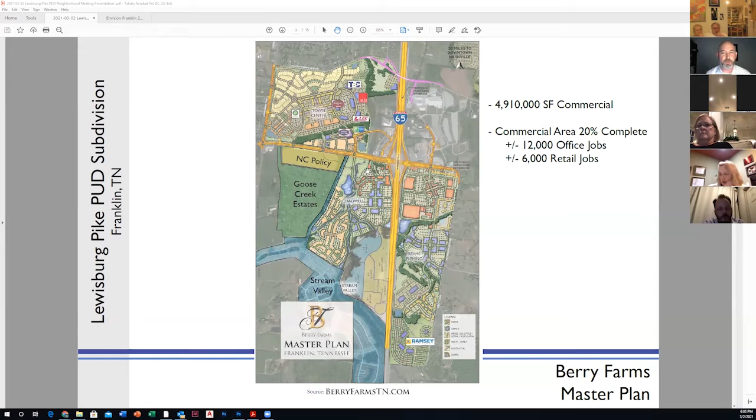This property is along the Lewisburg corridor, in immediate proximity to Berry Farms and the Berry Farms development. Berry Farms will ultimately have over 4.9 million square feet of commercial, becoming a very big job center here in the Franklin area along I-65. We're looking at the opportunities along Lewisburg Pike to potentially provide homes for those people who would be working at Berry Farms, who are looking for shorter drive distances, a shorter commute to the office or their place of business.

You'll recognize this property from 2019. We submitted it concurrently with Southbrook. Southbrook PUD is currently north and south of Stream Valley's main entrance. This PUD was withdrawn in its entirety after several of the aldermen asked that we intentionally phase or submit these developments in separate PUDs, and so that's what we have done. Southbrook was approved in 2019.

We don't have a neighborhood name yet established for this area west of Lewisburg Pike, so on the front cover it's referred to as Lewisburg Pike PUD. There will be a formal neighborhood name for this, but that name must be approved through Williamson County Emergency Services and by the City of Franklin, and that's a process we're going through. So we'll let your HOA presidents know or send out emails once we have an established formal name for this proposal.

The proposed development has not changed very much in layout from the Southbrook PUD. The Lewisburg Pike PUD consists of a total of 243 acres in size. Envision Franklin identifies the property in the conservation subdivision policy, and that policy creates development design guidelines very intentional to set aside and preserve open space. On our plan, we have a total of 61% of the site that will be preserved in open space areas.

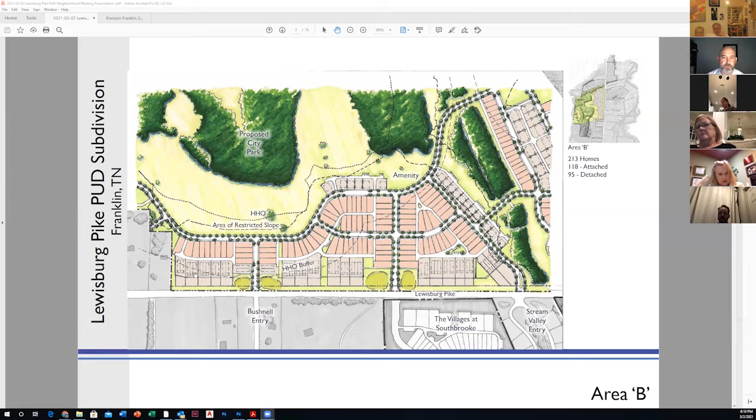So when we design this area, the multiplex buildings are designed to look and feel like one single family house. They have a common entrance facing Lewisburg, but they may have 2 or 3 families that live in each of the buildings.

And so you can see them here. This is the proposed Lewisburg PUD on this side of the road, and then the current approved Southbrook on the east side of the road with these multiplex buildings directly across the street.

Now, a lot of you may be wondering why we're showing a median divided boulevard for Lewisburg Pike. Ultimately, one day this will be the design plan for Lewisburg Pike, but we don't have a timeline or know when that construction would take place. When we do a master plan design, we always have to look into the future.

And someday in the future, it's planned by both the state and the city of Franklin for Lewisburg to be a median divided 4-lane road. So we have to design our plan to accommodate that future improvement, but there is no timeline today as to when that would take place.

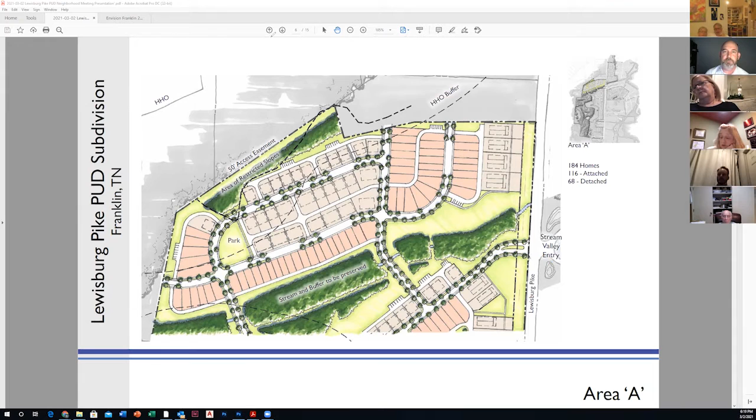Does that make more sense? Yeah, I understand now. Thank you. Here's Stream Valley, you're over here on the east side of the road, so directly adjacent to you or across the street. This is where the traffic signal would be installed to allow easier access in and out of both of those neighborhoods. Yep, got it, I agree. It's very helpful, thank you.

Hey Greg, this is Dennis. So question, you've got the Villages at Southbrooke happening now. Does the Meadows at Southbrooke go next, and then this area across the street, or what's kind of your plan as you look at those three segments? Sure, you may be aware of Chadwell's development plan that's being proposed here. In order for the Meadows at Southbrooke to have sewer, a sewer line needs to be constructed right down this little stream channel.

The timing of when this development, the Meadows at Southbrooke, would occur is really contingent upon Ford and Boyle getting together to talk through the dynamics of when that sewer line could be constructed.

Greg, sewage is at the corner of Goose Creek Bypass and Lewisburg Pike now, is that right? And is there any plans for that to come down Lewisburg Pike? There's, I don't know if you can see this, a kind of a ridge line right through here. So the center of the ridge would be through here, imagine that center line continuing.

Anything north of that is going to have sewer that goes toward that intersection. Anything to the south of that is going to follow through this tributary, and I think there's another one down in this area here. Those are existing sewer lines. So a little bit of a different sewer basin than what's up there at the intersection of Goose Creek and Lewisburg Pike.

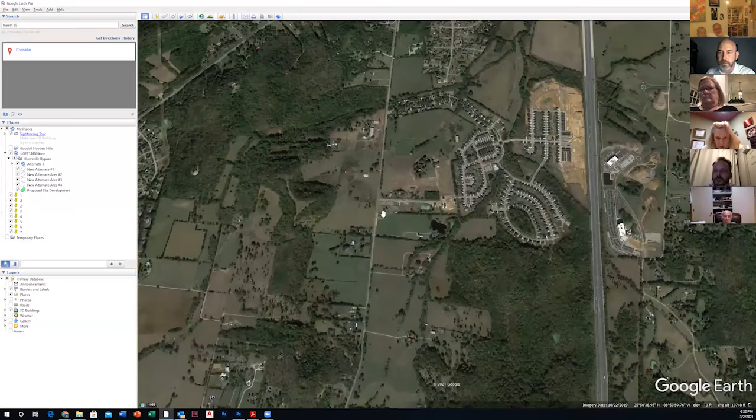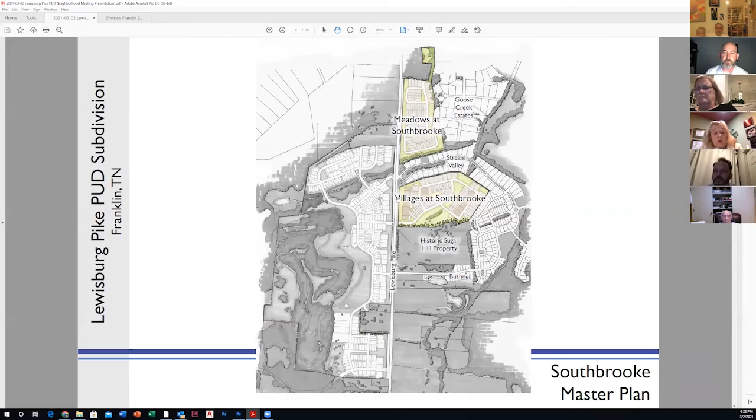What they're looking at is potentially a collector road that would go from this side of I-65 all the way across in some way. Now I'm drawing dashes, but I don't have a direct path, but in some way connecting back over to Goose Creek Bypass and Columbia Pike. So that being said, what we're showing as a part of this southern neighborhood is the start of that collector road, but we don't have control over what path it would take to eventually make its way to Columbia Pike or how long that build out would occur.

But yes, the city engineering department is asking us to start that potential collector road that would stop. It would go from Lewisburg Pike and stop at the property line here.

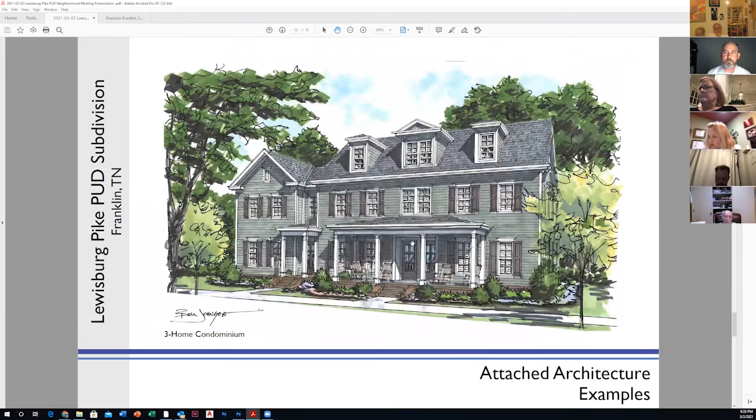Thank you for that. Yes, sir. Hey Greg, this is Dennis again. So right now, what's your process, what's your steps? You're going, one, just to become part of the city. What's your timeline for the, we'll call it the west side of 431?

Sure. So tonight is the third step in our process. We've made a pre-application submittal to the city, and we reviewed our submittal with city staff as of this morning. Tonight is our neighborhood meeting. We're planning on making an initial submittal on March 8th, which would put us on track for the March 25th joint conceptual workshop. If we continue on path, that would put us on track for the Planning Commission on April 22nd. May, June, and July would be board and mayor and alderman meetings, their voting sessions. So if it was a linear path and every single meeting was kept in that path, then...

By the end of July, this property would likely be annexed into the city of Franklin and the development plan approved. As far as the start of construction, Ford would prefer to really focus its time, energy, and efforts on this first phase of Southbrook.

The city of Franklin is contemplating a small area plan for this area south of Ladd Park that includes primarily future development growth that would occur over on the east side of I-65. That being said, they are looking at sewer capacity, and they're looking at a regional traffic study that would encompass more of this area. So we want to go ahead and have this plan be a part of that conversation and discussion. We're excited that the city is really starting to look regionally, looking a little bit bigger picture about all of the growth pattern and future development that's down both the Carothers Parkway corridor, I-65 corridor, and Lewisburg Pike. So we're submitting this now to really get into that conversation.

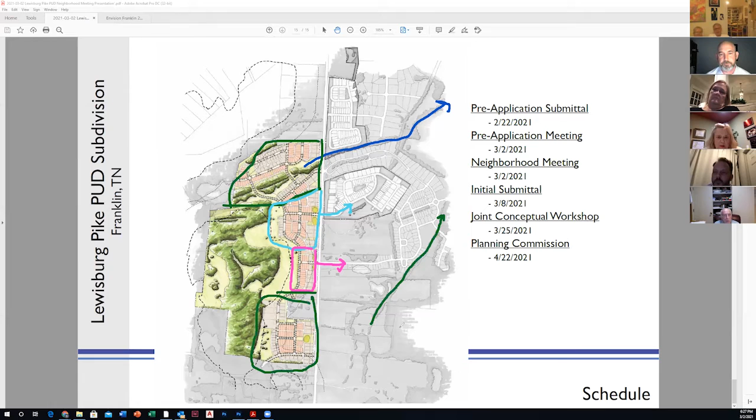So in other words, there would be no sewer for this area. And when this is constructed, how would you get rid of the sewage problem for that area? Sure, the city of Franklin looks to the private developer to extend those city services. So the private developer would have the responsibility of working with adjacent property owners to acquire easements to achieve that sewer plan.

There is a potential from this part of the road to stay along Lewisburg Pike and then go down Bushnell, although that really doesn't follow the city of Franklin's long-range sewer plan. They would much rather have a sewer line that's traveling down through this lower portion here. So there are a couple of options on how this area to the south does get sewer, but the city of Franklin really looks to the private developer to work through those questions.

Well, what I don't understand is these proposed houses in the salmon color on the south end. Would they have septic tanks? No, they could be approved as part of a development plan, or a bigger master plan. But before you could get a site plan, construction documents, or a grading permit for this area, we would need to work through where that sewer line would go. So no, they would not have septic tanks. So if that area is constructed, it would have to have sewer. Is that correct? That area could not be constructed until sewer is made available.

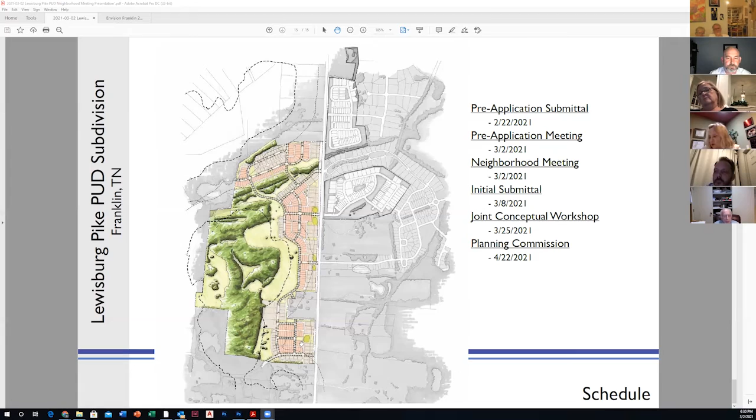Well, here's what I don't understand, maybe you can help me understand it. I saw that the property south of this was for sale on Lewisburg Pike again. Is that not so, or am I mistaken?

I'm not sure of any properties to the south of this. If there is a for sale sign on this property, Mike Ford and Ford Homes has this property under contract. There was 170 some odd acres of parcel, is this part of that 170 acre parcel? I'm not sure, but let me do a little homework, and why don't you reach out to me sometime this week or first next week, and I'll help you figure that out.

All right, I'll look forward to talking to you then. Yeah, I may have to come out there and meet you and see what you're talking about, but we'll do that. All right.

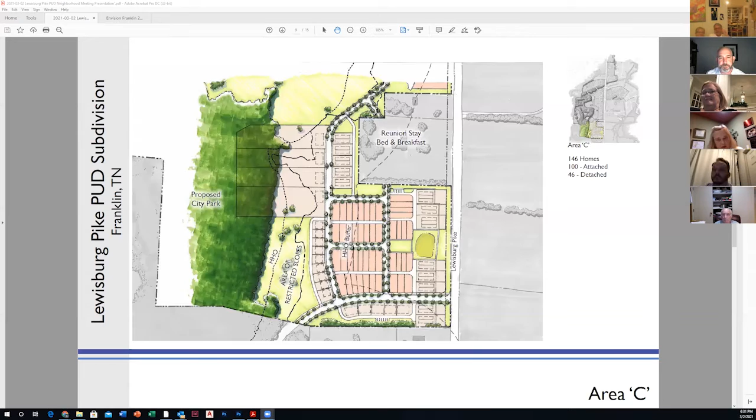Hey Greg, is there any commercial or retail? There is no commercial or retail. The conservation policy allows for a clubhouse, amenity area, swimming pool, which we're planning for here, but no commercial activity.

Show me again where you just pointed to. All right, yeah, let me mark that. The pool and amenity area will be located here. Okay, thank you.

Yes, ma'am. I was wondering where the people will be zoned for school. The schools will include Thompson Station Elementary, Thompson Station Middle School, and Independence High School. Okay, thank you. Yes, ma'am.

And then what is the price point for the houses? I don't know that they've been established yet, but if you looked at the homes Mike is currently selling in Berry Farms, that will give you a very good understanding of both price point and square footage and size. Great, thank you.

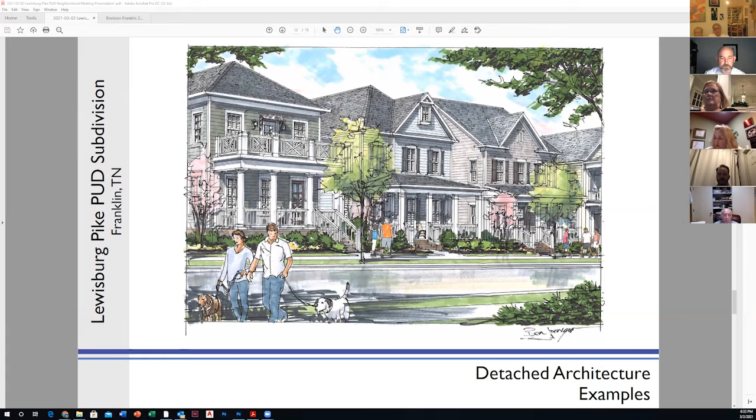Greg, it's Kim again. When you said the traffic signal going into Stream Valley and across the street would start when construction started for the west side, is that correct? We have several different phases and we're still working through the finer details of that. But we do know that this general area would be phase one, and it would line directly across from the Southbrooke main entrance. So this traffic signal would not likely be constructed until this road was built, and before this road is built, we need to have this sewer line connection over to Berry Farms. So I don't have a timing on that yet. I can't tell you it's going to be in '24 or '25, but my guess is it's probably going to be around that time.

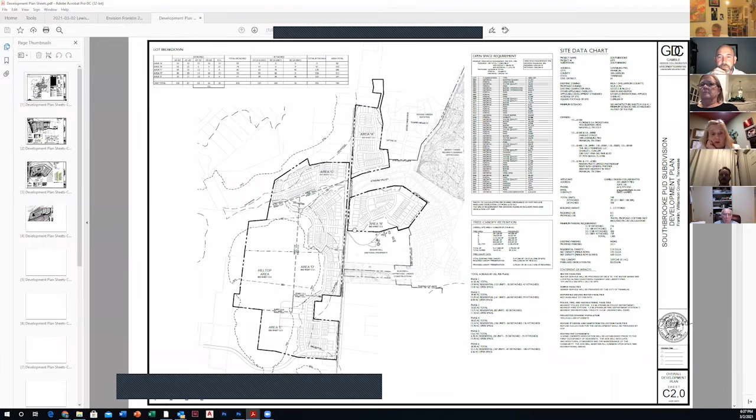Hey Greg, as you're pulling those up — so the villages right now, that's the part that's under construction. What's their timeline for the roads being done? What's their estimate? My guess is that by fall of this year we're going to start to see the first houses under construction. Typically it's about five months to build a house before you have the first resident move in.

Is this helpful? Yes, thank you, great. So this is what's currently under construction — this is the Southbrooke development plan for the villages to the south. That's Randall Lane there. And you said homes would start construction in the fall? I would think so, yes.

So Greg, you know our pain point — this is going to go directly into Kim's, right by Kim's house, and some other neighbor who's not on Facebook. Will Stream Valley roads be used for construction? No, all the construction activities are directly off Lewisburg Pike. Yeah, there was a lot of debate and discussion about having a direct road from Stream Valley all the way through. After meeting with you and several of your neighbors, we discussed a more circuitous path with a few turns that would still allow residents to get from Stream Valley out.

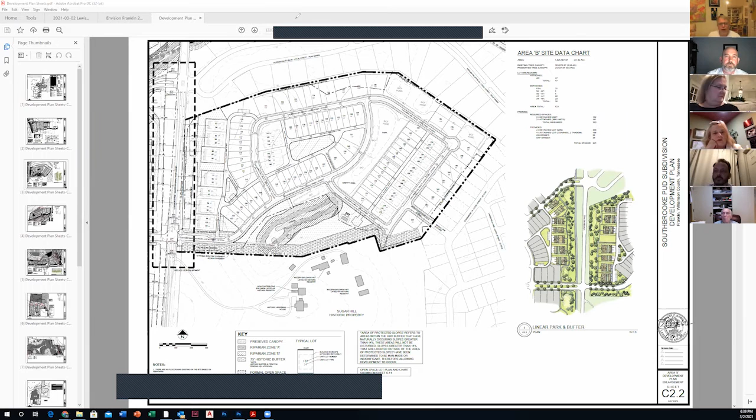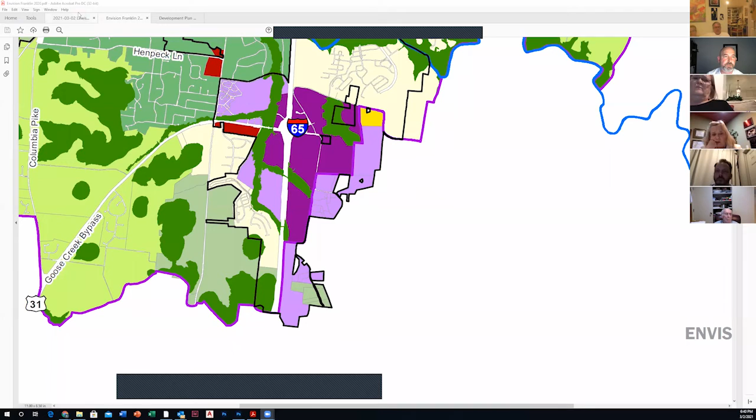Do you know if any of this changes where we are on a flood zone? I'm not familiar with any. There are flood areas — this is the Envision Franklin map. You can see these green areas here through Stream Valley and through the Chadwell site; those are 100-year floodplain. The dark green you're seeing over here on the west side is the HHO area — that's the hilltop protection. So the only floodplain I'm aware of is down here along the streams and those tributaries.

Any additional questions, comments, thoughts? Greg, Larry Levine again. Yeah, Larry. The changes to Goose Creek bypass — is that just at the intersection or does it go further down Goose Creek bypass?

Sure, that's a great question. These are the improvements associated with Southbrooke that incorporated the west side of the development at the same time. Our traffic study looks holistically at all the improvements along Lewisburg Pike. Now, Berry Farms is going to be making additional improvements down Goose Creek toward I-65 as they develop their Chadwell master plan. So there are multiple private developers doing multiple road improvements.

Well, in particular, is Goose Creek bypass going to be widened as far as the fire station?

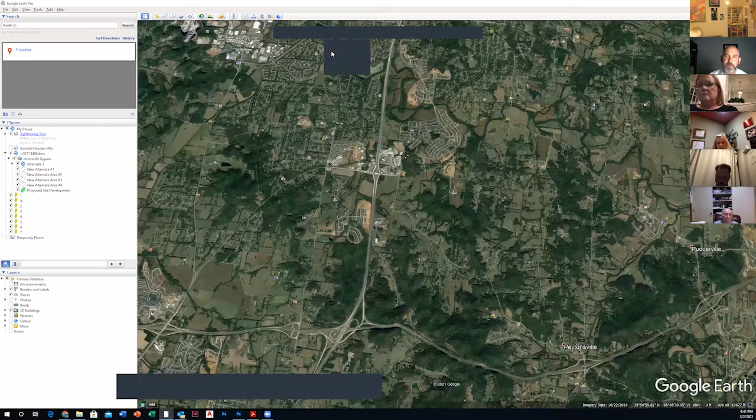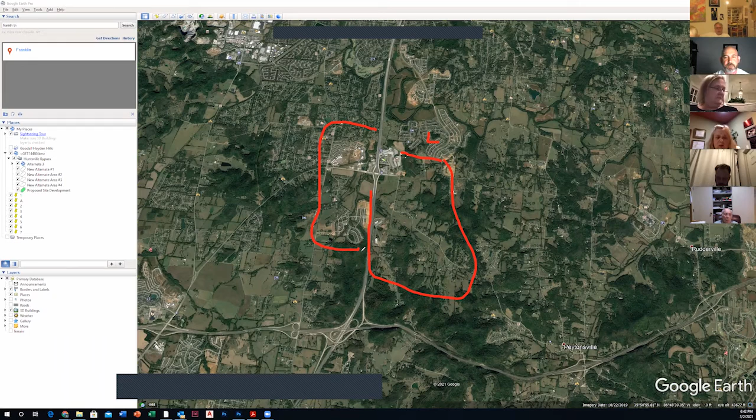There's on the west side. I'm not exactly sure. The city is going to start a regional study called a small area plan that's going to be looking at this whole area. I'll try and draw a line around it here. You're familiar with Ladd Park, which is here. So they're going to be doing a regional analysis that takes into consideration future growth in this area. It has to contemplate the build out of Berry Farms, the Southbrooke area as well. So I don't know the results of what that traffic study is going to tell us yet. I am not a traffic engineer, but we'll have to see what the results of that study tell us.

In other words, you can't tell me whether Goose Creek bypass is proposed to be widened on the west side of Lewisburg Pike. That's right, I don't know today. But you're not planning to do that, right? Yeah, the traffic engineers in the city of Franklin are saying that we are not going to be creating enough capacity to meet that requirement to make additional lanes. So that would not be a part of our scope of work.

Okay, thank you. Yes, sir. Hello, this is Cheryl Nesbitt. Hey, Cheryl, hi, I have a question.

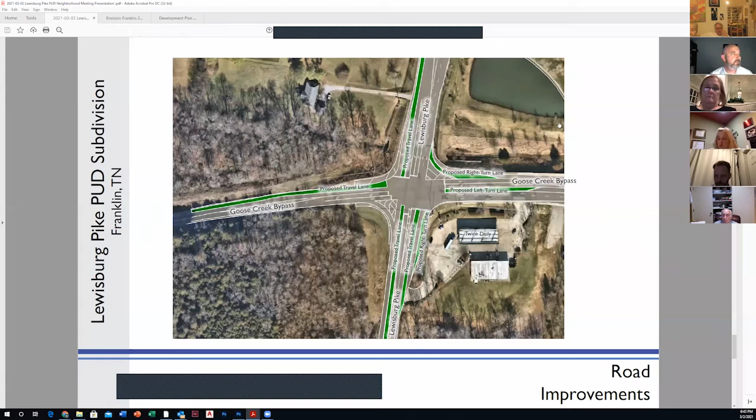I know that Brentwood, Tennessee made Newsweek magazine because they've connected all of their neighborhoods with walking trails. Is there a walking trail plan to go from your area to Berry Farms? Because you can't put all those people's cars over at Berry Farms to eat at that little pizza place. That's true, we are an incremental piece of the puzzle. We are planning on a greenway trail that will go the length of the development along Lewisburg Pike. Ultimately, I'll flip back to this graphic here. You can see the intentional additional greenway trails going through here.

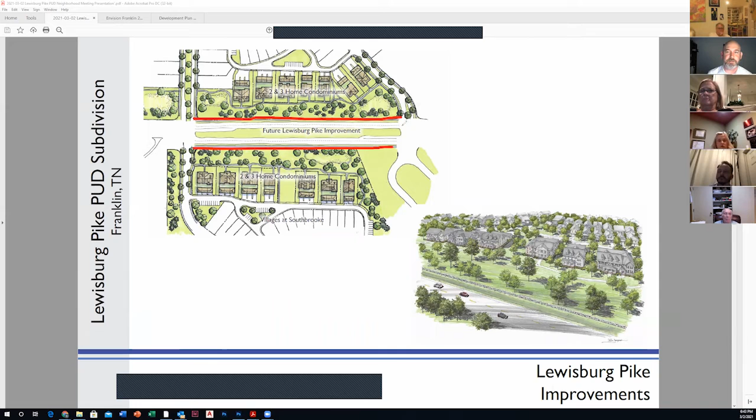Once Southbrooke is completed, will there be a walking path somehow going all the way to Berry Farms? I really don't think so. I think that as other developments are considered, that greenway trail can be extended. But there isn't contemplation today to have a greenway trail all the way along Lewisburg Pike at this point.

What about under the road? What about under Lewisburg Pike or over Lewisburg Pike and Goose Creek bypass so we can cross the street? I can explore that, you're the first person that's brought this up. Greg, correct me if I'm wrong, Chadwell plans to do something underneath Goose Creek, right? From Chadwell to... Yeah, they sure do.

I can go back to this aerial. Chadwell has, let's see... Well, I was trying to find the Berry Farms Greenway Trail.

Yes, ma'am. Greg, quick question about the zoning. What's the timeline of zone changes and how much of the area around here is that going to affect? The proposed annexation and zoning is only for the property that's highlighted here, shown on this master plan. The zoning process will take us through July. At the end of July, following that linear path, would include annexation, plan of services, zoning of the property, and the adoption of the master plan. So it's all done in four votes by the Board of Mayor and Aldermen.

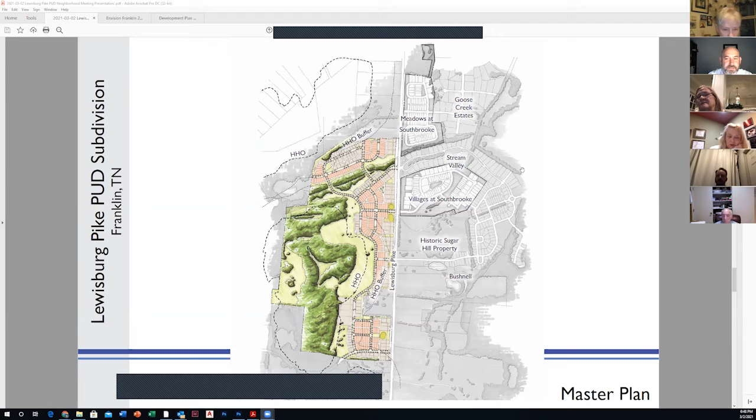Greg, I just want to thank you for being so considerate on this development with Stream Valley neighborhoods. You've seen and feel the pain that we're going with some other topics, so I just want to thank you for your consideration, not adding more pain points. You can call me anytime, and we've got a team working on questions you sent me this morning. That's separate, but I just want to thank you for your consideration on this. So thanks again.

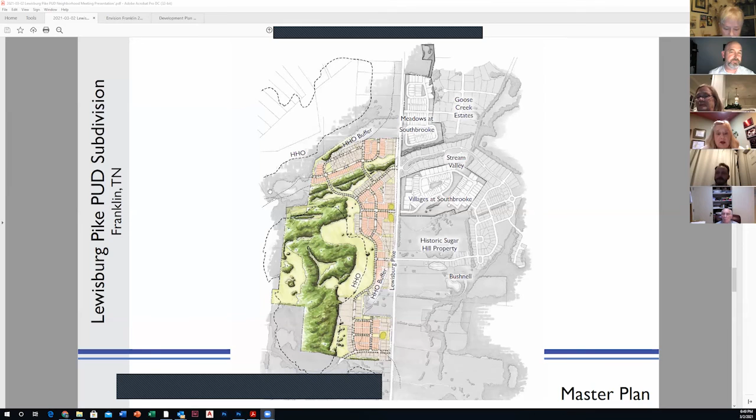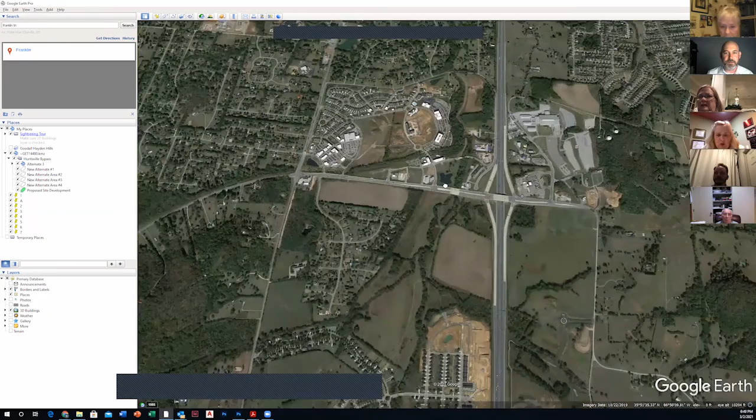Greg, yes ma'am, this is Betsy Hester, one of the county commissioners. I'd like to thank you also. Could you show the sewer in the area of Goose Creek Bypass and Lewisburg Pike? You showed that before, but since you have such nice maps here tonight, would you help me understand what we're talking about?

Sure, I'm going to give you a little bit of the big picture here. There is the Red Wing pump station located about in that location. There is a manhole at Goose Creek and Lewisburg Pike, and there's a sewer line that follows this creek here and goes up to the Red Wing pump station. There is another sewer trunk line that goes through Berry Farms and ties into it. So those are the two existing sewer trunk lines that are there today.

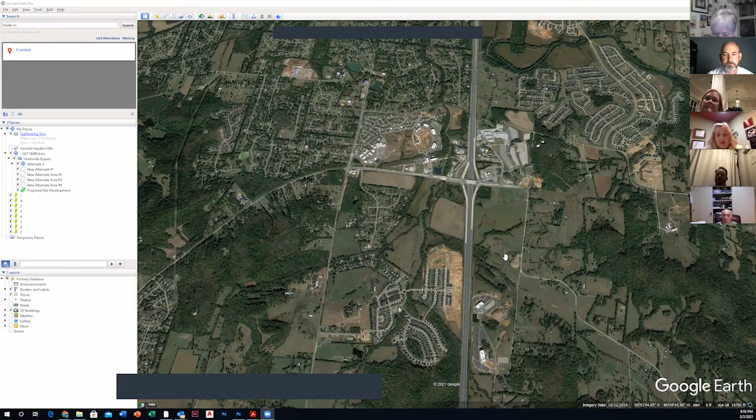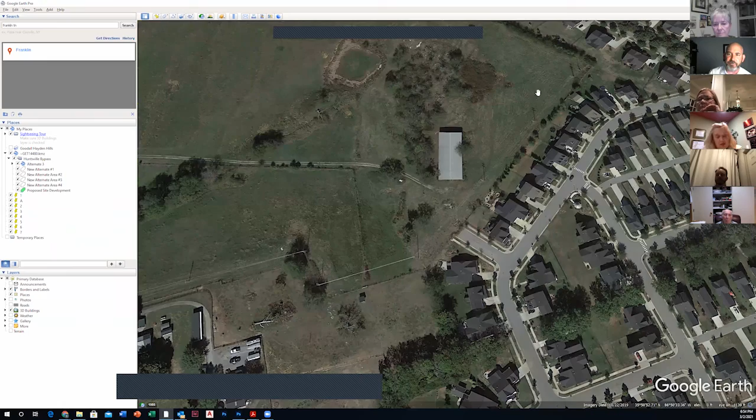We have those electrical power lines behind us. Those are remaining, I'm assuming? They are. That's part of the regional power system for this area, and those will remain. Now they're going to remain in open space, so you have, I can't remember the number, 60 feet of buffer before you get to the lot line over here. So yeah, there's additional space in there, but those power lines do stay.